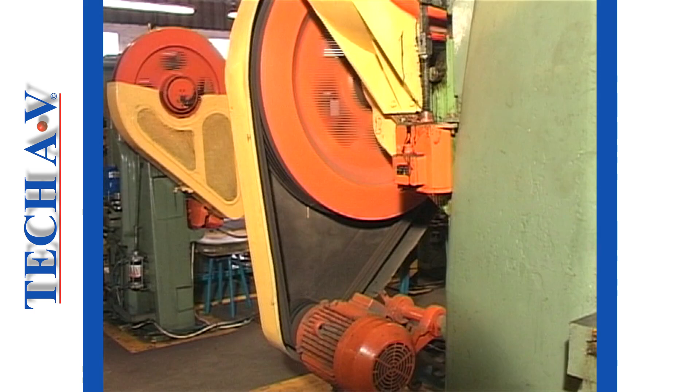As can be expected, no belt can last forever. Sooner or later, belts should be renewed to avoid breakdowns.

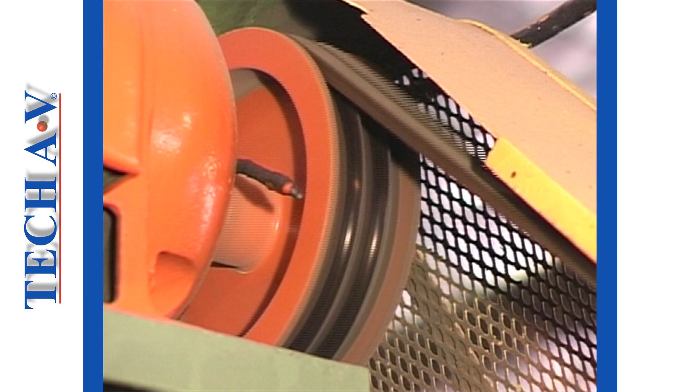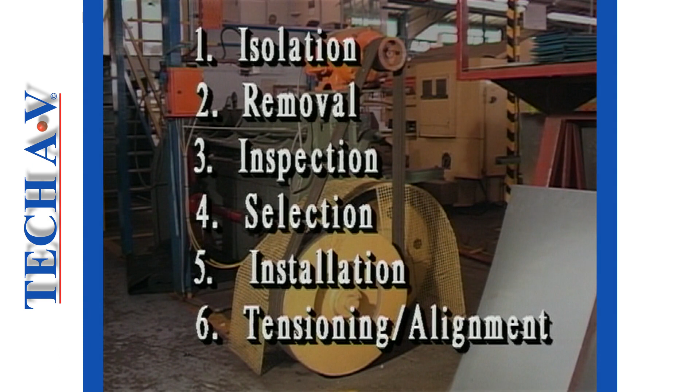The procedure for belt replacement is relatively simple, and the job can be broken down into the following steps: first, isolation of equipment; second, removal of old belts; third, inspection of pulleys; fourth, selection of new belts; fifth, installation of new belts; sixth, tensioning and alignment of new belts.

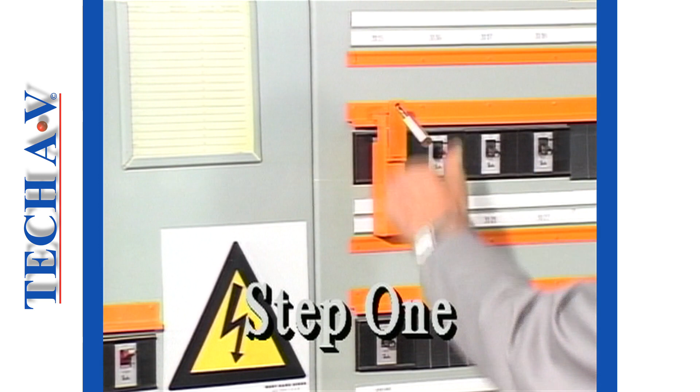Step 1, isolation, was covered in the first program of this series. This important step must never be overlooked.

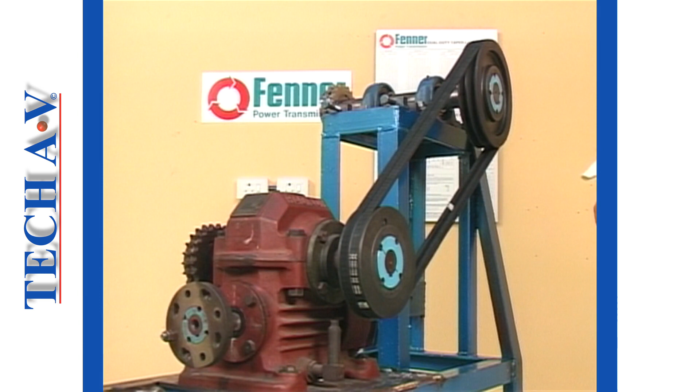For purposes of demonstration only, we shall be using a simulated belt drive without a guard. In the workplace, you would next remove the guard in order to gain access to the belts. Step 2, the removal of belts.

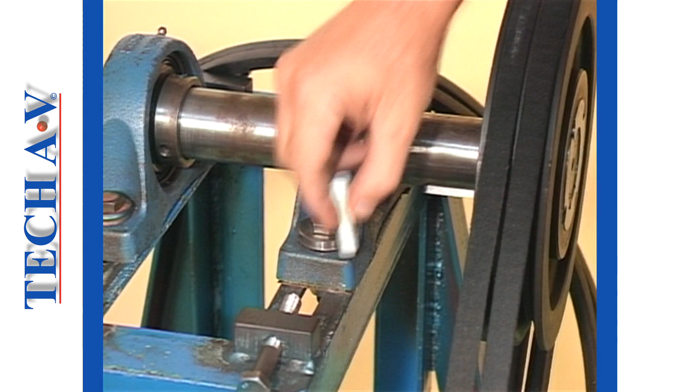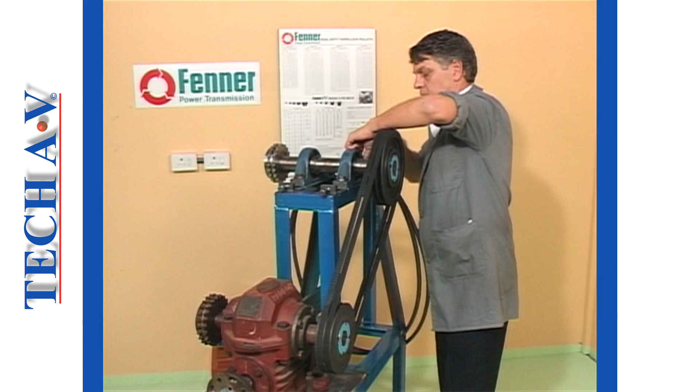Begin by first marking the position of the movable unit for later reference. Slacken off the movable unit, which in this case is a pedestal bearing arrangement, but it could also be the drive motor. Ensure that the adjuster screws are wound back and slide the movable unit to slacken the belts fully. Then remove the belts. There should be no need to use levers ever when removing or replacing belts.

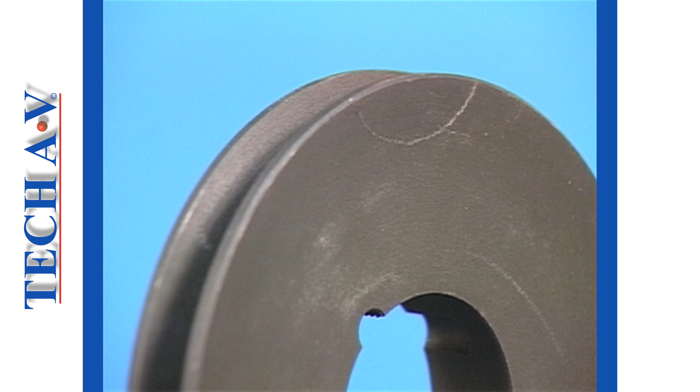Step 3, inspect the pulleys for damage or wear. Physical damage, such as chipping or cracks, could result in serious mishap or injury. Such a pulley should be replaced with a new unit.

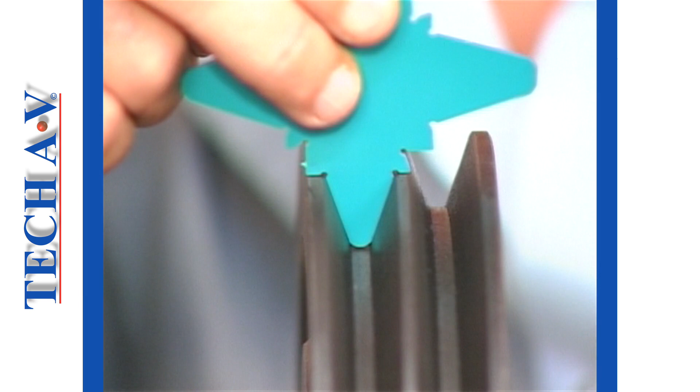Check each of the pulley's grooves for excessive wear. This is not always obvious, but by inserting a profile gauge into the groove, you will be able to see if the grooves are worn. Typical wear would appear something like this, caused by prolonged use or contamination with dirt or dust.

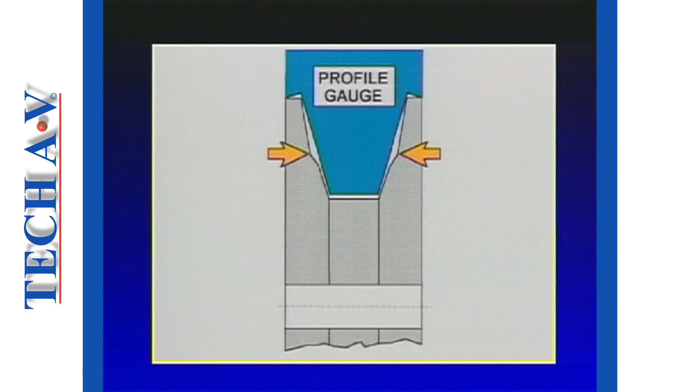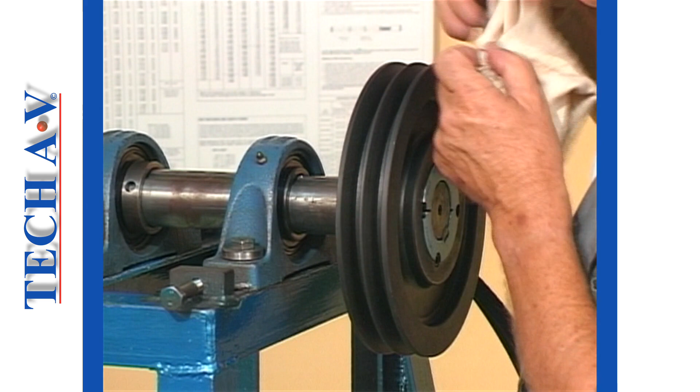Ensure that the pulleys are clean and free of grease or oil, which would otherwise impregnate the new belts, causing slippage and deterioration of the belt material.

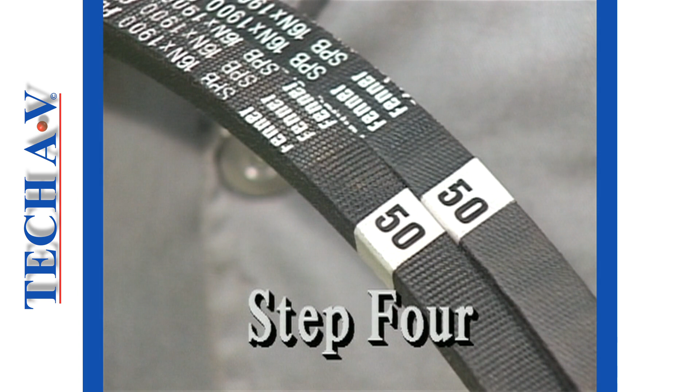Step 4, the selection of new belts can now commence. It is important when fitting belts to multiple drive pulleys that the belts are correctly matched in respect to their nominal lengths. Let's discuss this a little further.

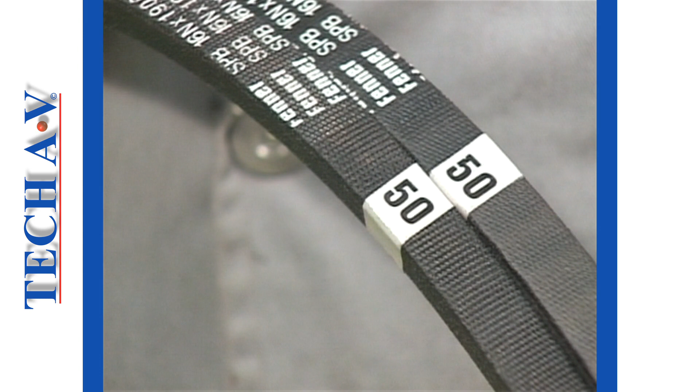Belts intended for multiple drive use will show a coding, which is a number printed next to the belt label. In this case, the number is 50. 50 is the international standard code for a belt which has an actual length equal to the nominal length.

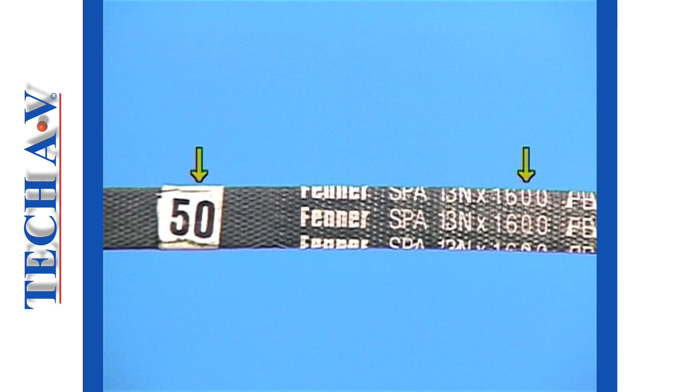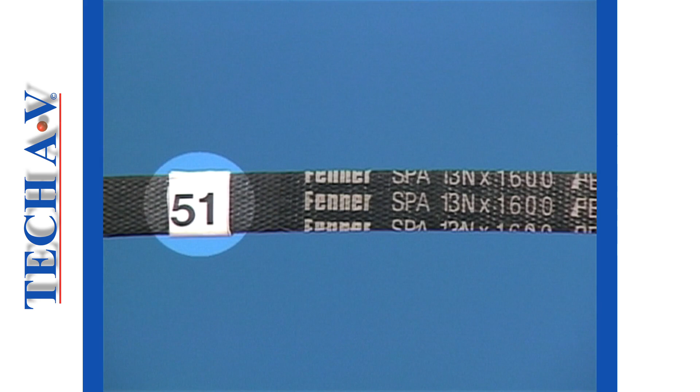Ideally, all belts on a multiple drive would bear the same codes. However, owing to manufacturing variations, belts may differ slightly in their actual lengths. Every 2 mm variation from nominal length is represented by 1 unit above or below the number 50. For example, a code of 51 on a 1600 SPA belt indicates that the actual pitch length is 1602 millimeters.

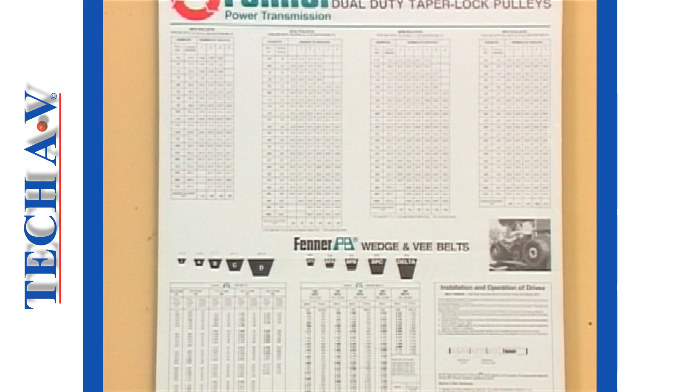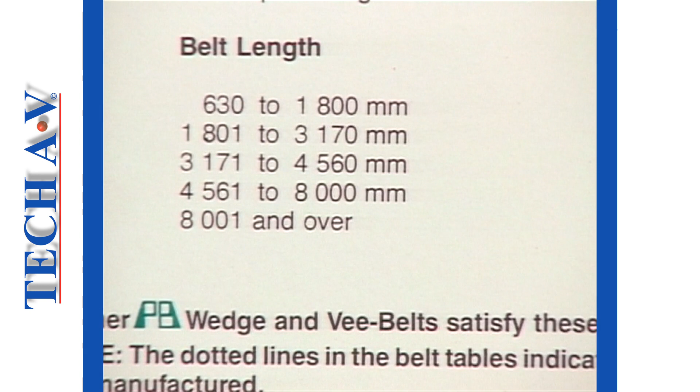From a practical point of view, you must ensure that the maximum variation of belt lengths does not exceed that recommended by the manufacturers. The allowable variations increase according to various belt lengths, and for this reason, we suggest that you refer to the manufacturer's chart for the variations.

The next step in selection is to know or find out what length of belt is needed to go around the pulleys. There are basically 3 ways to do this: find out from the equipment manufacturer's specifications, use the label information of a removed belt if it is readable, or calculate the length using a standard formula.

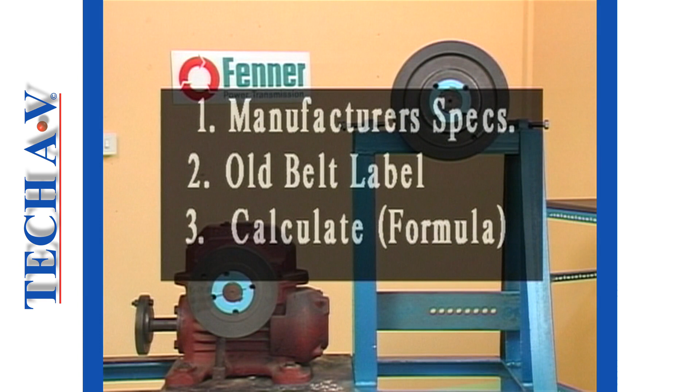Let us consider the most accurate method, namely the formula method for calculating required belt length. To begin, set the movable unit back to the marks you made before loosening.

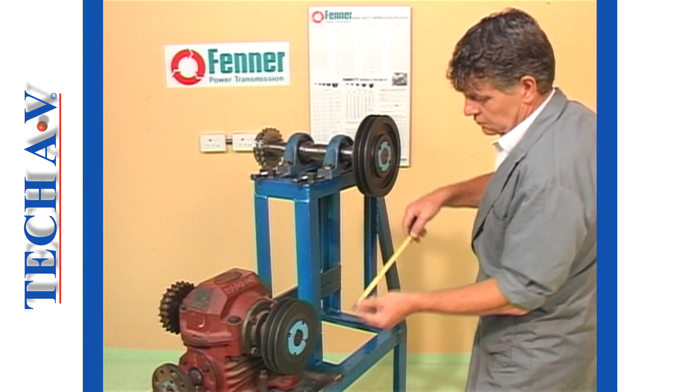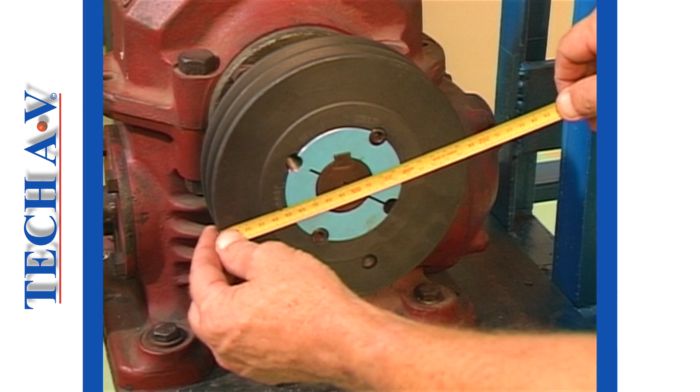Next, you must take 3 measurements. First, the distance between shaft centers, which we'll call dimension C. Next, measure the diameter of the largest pulley, which is dimension large D. Then measure the diameter of the small pulley, calling this dimension small d.

Now we can apply the formula, which looks complicated but is actually easy to work out using a pocket calculator. We'll do an example in stages.

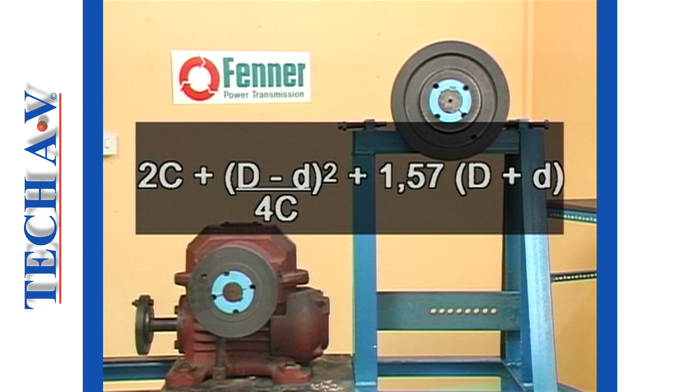On our simulator, the C dimension is 615 millimeters. The large pulley diameter, large D, is 240 millimeters, and the small pulley, or small d, is 185 millimeters. Transpose these figures into the formula and calculate the result to arrive at a figure of 1898.48, which will be the required nominal length in millimeters.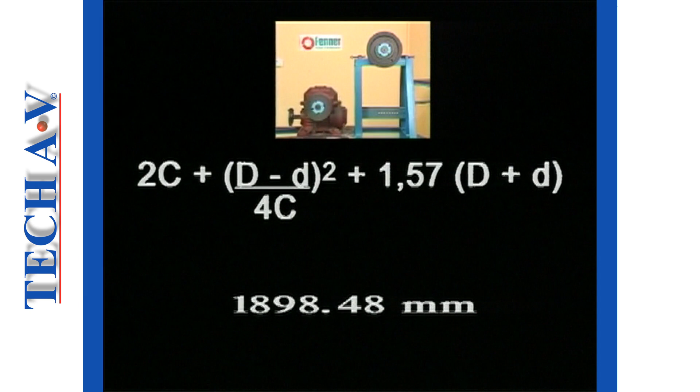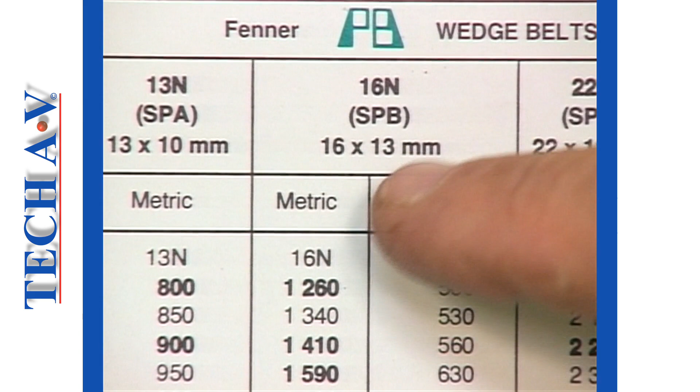Now look at the belt reference chart under the SPB column and look for the manufacturer's length that most closely matches your calculated length, which in this case is 1900 millimeters.

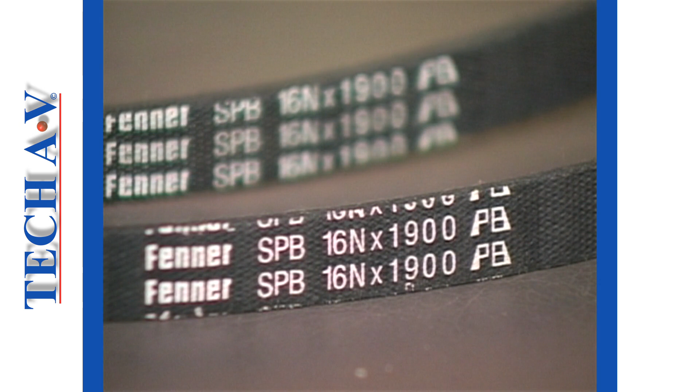We now order or obtain matched belts bearing the label size SPB 16N by 1900. Having selected the belts required, you can now move on to step 5 and install them.

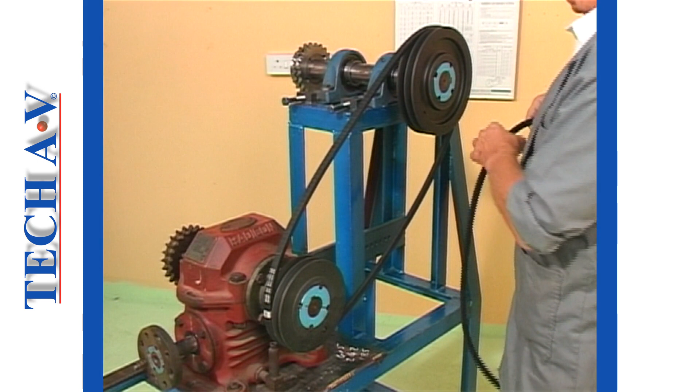First, make sure that the adjustment has been fully backed off. Correctly selected belts should slip easily across the pulleys, and unnecessary force should not be required. Fit each belt into its relevant pulley groove, and we're ready to begin.

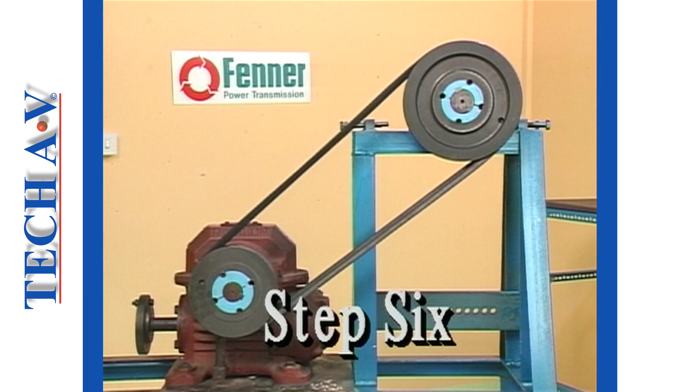Step 6, adjustment mainly involves obtaining the necessary tension, and on our simulator this is achieved with adjusting screws, suitably packed to provide enough movement. Equal turns of the adjusting screws and then rotation of the pulleys will ensure correct bedding of the belts as the tension increases. Ideally, a belt is correctly tensioned when the deflection, checked at midpoint between pulleys, falls between the specified amount.

Continue tightening and rotating until moderate tension of the belts can be assessed when pressing down on the belts at mid-span. Avoid using your hands upon the pulleys whilst turning them. Rather, use a convenient shaft or other safe means to rotate when necessary.

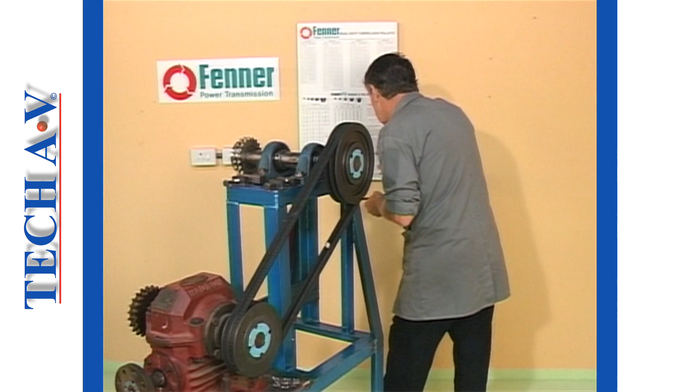Nip the movable unit's hold-down bolts, and then using a belt tension indicator, proceed to measure the tension. Let's take a closer look at how this is achieved.

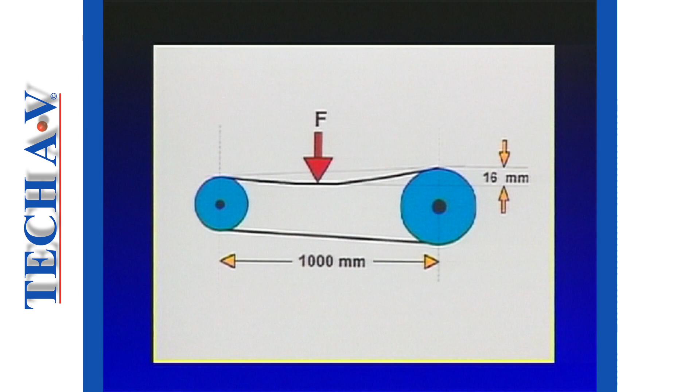A belt is depressed at a point midway between shaft centers, and the force F required to deflect the belt by 16 millimeters for every meter between shaft centers is measured. This is then checked against the belt manufacturer's tensioning chart.

On our simulator, the shaft centers are 0.615 meters. Therefore, the deflection required is 16 times 0.615, which calculates to 9.84, or more conveniently, 10 millimeters.

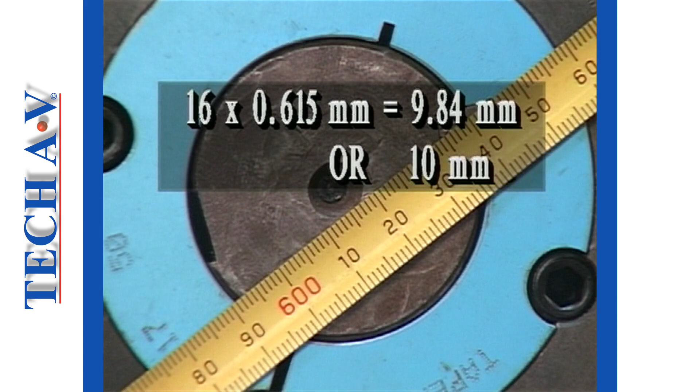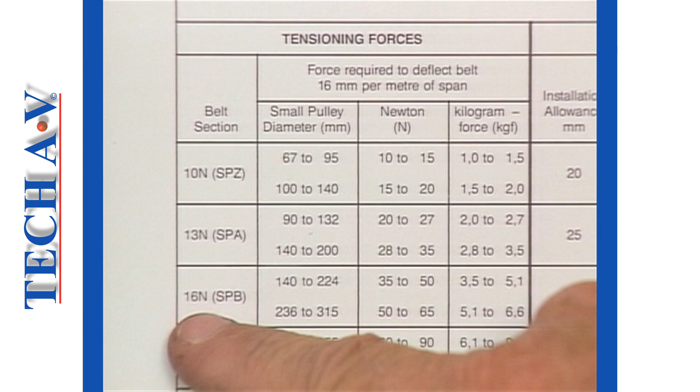Referring now to the chart, we consult the tensioning section for an SPB belt to find the force necessary to deflect our belts by the calculated 10 millimeters. Note that 2 force figures are provided. The upper figures listed are for a small pulley diameter of between 140 and 224 millimeters. The lower figures are for a small pulley diameter between 236 and 315 millimeters.

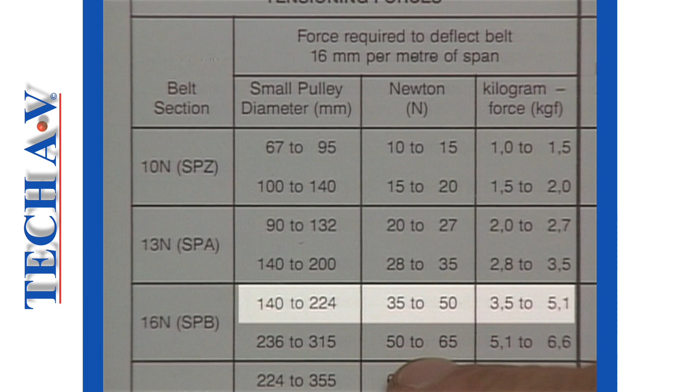As our small pulley diameter is 185 millimeters, we use the upper figures. In this situation, we read that a force of 35 to 50 newtons, or 3.5 to 5.1 kilograms of force, is to be applied.

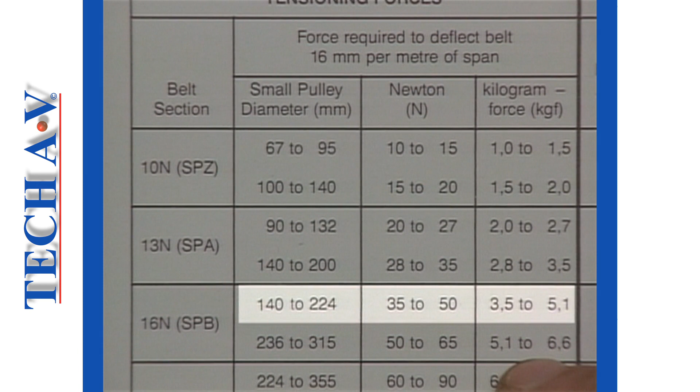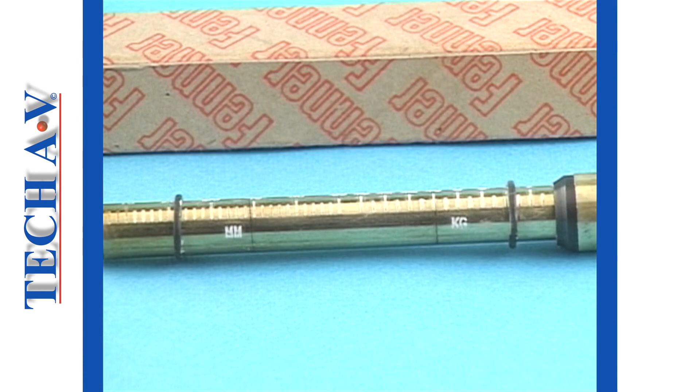The tension gauge can next be prepared, but let's first take a closer look at the gauge itself. You will observe that it has two scales on the barrel. The lower section scale is graduated in millimeters. The upper section scale is graduated in kilograms of force.

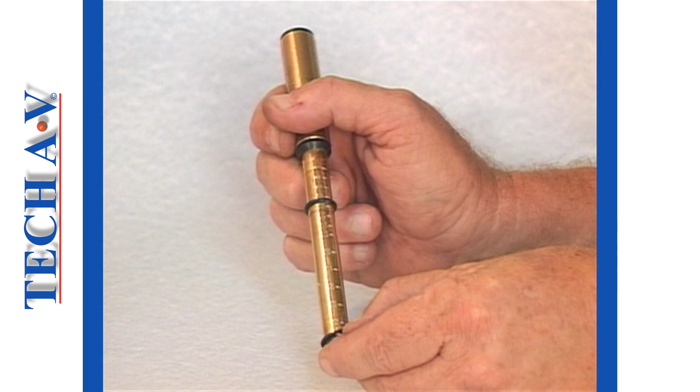Two rubber rings are provided to act as markers. These rings can be set by slipping them along the scale area of the barrel. Set the lower marker ring so that its top edge aligns to the calculated or required deflection on the scale, which in our case is 10 millimeters.

Next, place the upper marker ring against the edge of the tube or plunger, and we're ready to check the tension.

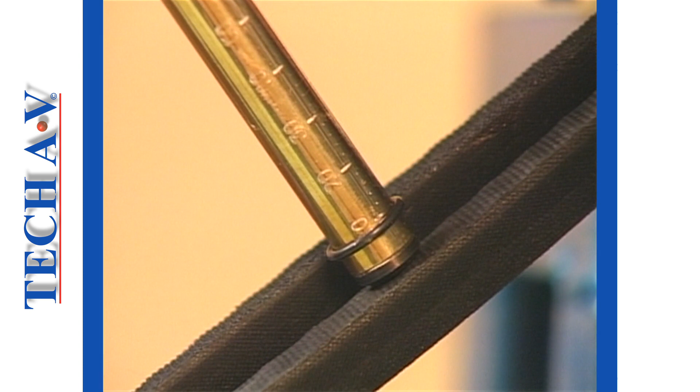Apply force at right angles to the center of the top belt span. Keep forcing on the plunger until the bottom marker ring aligns by eye to the top edge of the adjacent belt. Remove the tensioner and note the position of the top marker.

Note the scale reading at the top edge of the kilogram marker. This indicates the force that you applied. Compare your reading with the chart as we discussed earlier.

Readjust the tension, if necessary, until the kilogram reading on the gauge shows the maximum figure specified. During initial operation, or running in, belts may lose tension slightly. However, providing that the tension does not fall below the lower limit specified, there is no need to readjust.

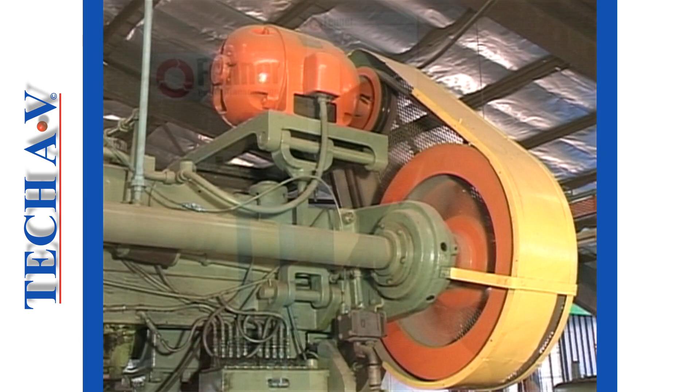It should be well noted that correct belt tensioning is vital to the drive operation. Incorrect tensioning is the prime cause of premature belt failure.

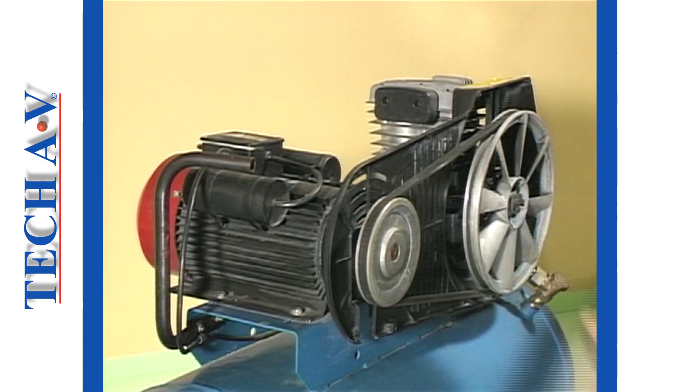When adjusting a single belt drive, use a straight edge across the top of the pulleys in order to provide a reference edge for the bottom marker.

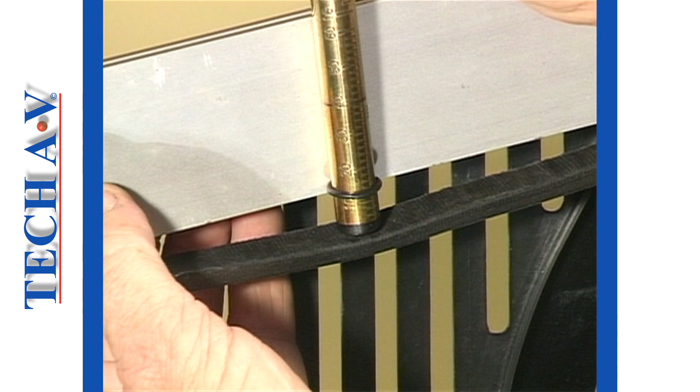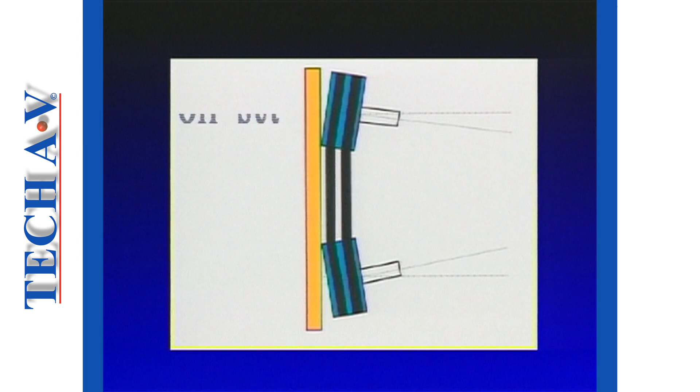It is wise to complete a belt replacement and tensioning task by checking the alignment of pulleys. A suitable straight edge is employed, whereby we can check such conditions as an offset pulley or setback, or non-parallel shafts.

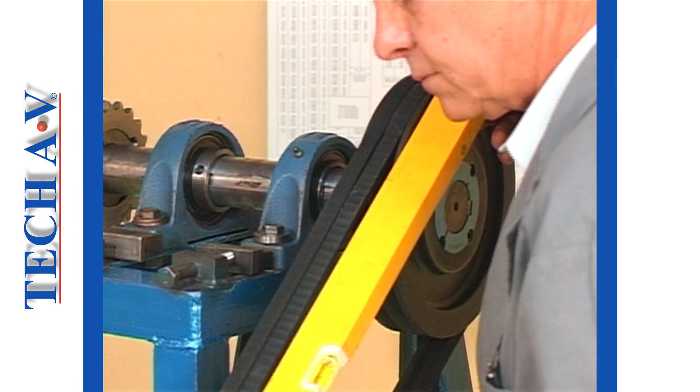The straight edge should be used to check across both pulleys in two positions, one below the shaft centers, the other above the shaft centers. Ideally, the pulley edges should contact the edge of the straight edge when checked above and below the shaft centers.

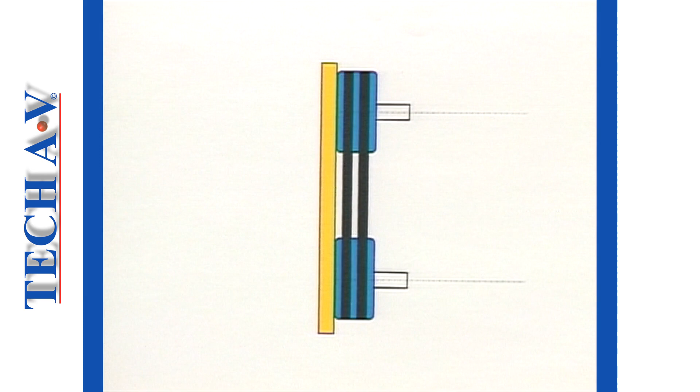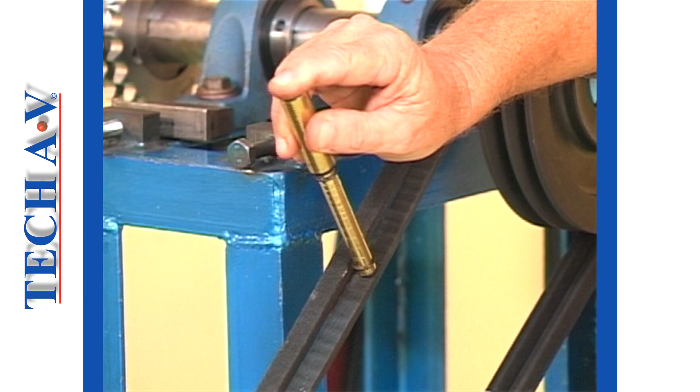Correct any misalignment by adjusting the movable assembly. Always recheck belt tension after making any alignment correction. Let's take a break now as you get in a little practice with the replacement and tensioning of belts.